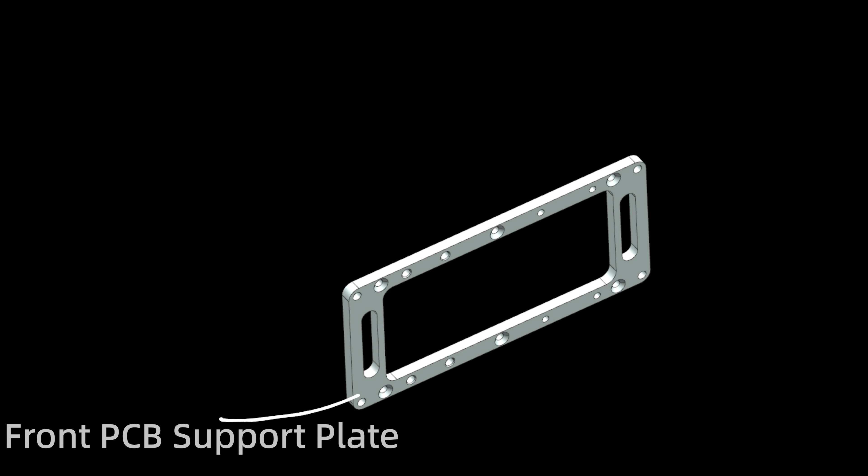The frame structure, as shown in the figure, consists of 6 integral parts: front PCB support plate, back PCB support plate, upper PCB holder, bottom PCB holder, TI detector holder, and EO holder. Now, let's focus on the PCB support plate and the PCB holder.

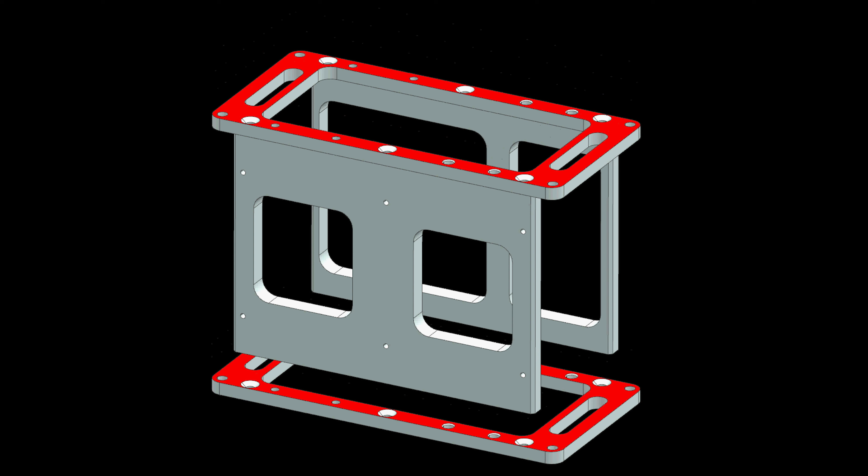As shown in the figure, the red area serves as a mounting area, and the surfaces of these parts must be accurately aligned before they are fastened with screws. As a result, we have set a positional tolerance requirement of 0.01 for parallelism at the corresponding position shown in the drawing for these 4 components. These strict requirements ensure a tight and accurate fit, which guarantees optimal performance and reliability of the thermal imaging devices.

Deformation is a common challenge when machining thin, flat parts. Reduce the feed rate during each machining operation and increase the number of machining passes. This allows the stress of the material to be released gradually and evenly. In the context of these 4 parts, this method allows precision requirements to be met while effectively managing machining costs for the customer.

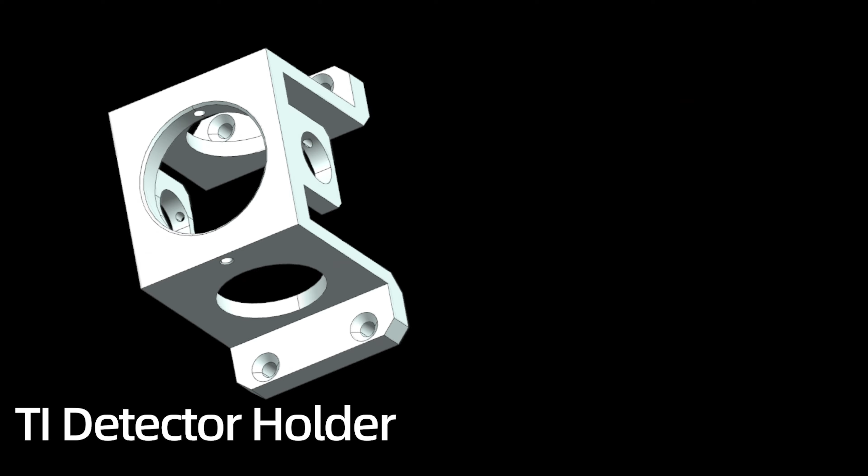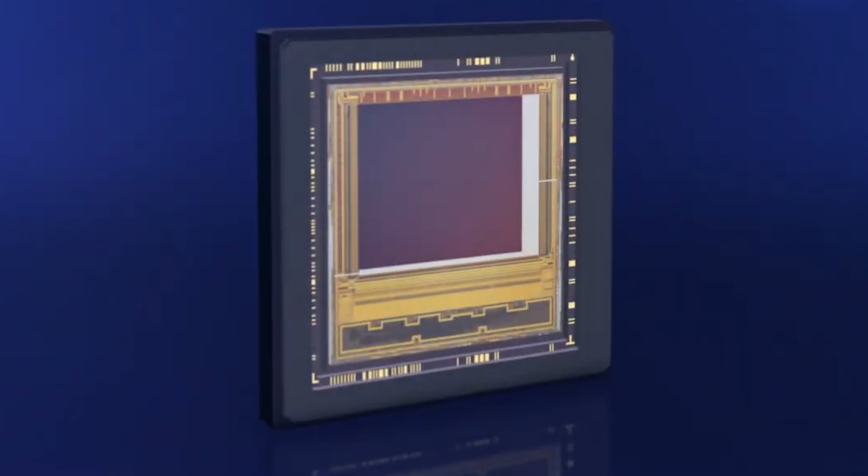The TI detector holder and the EO holder play a critical role in supporting sensor components designed to detect and collect signals from the external environment. The precision of these sensor components is critical, as any installation angle or position offset can directly affect the accuracy of the input data. The EO holder acts as a housing for the low-lux CMOS, a critical component in the imaging system.

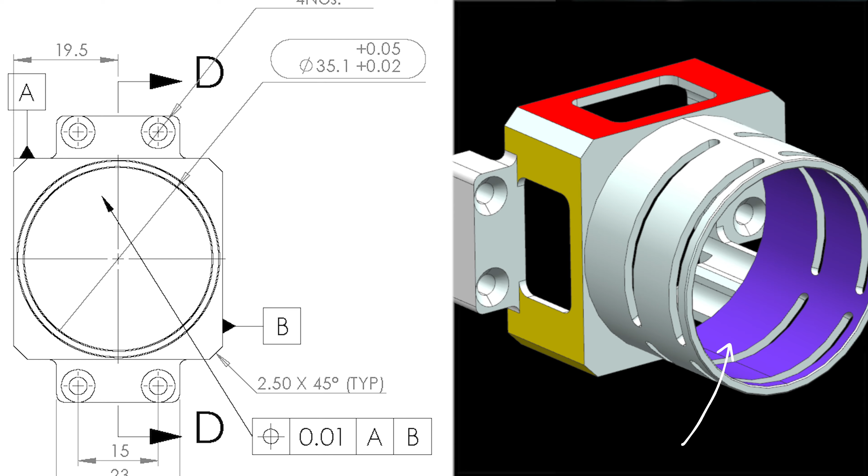The drawing shows that the positional accuracy of the purple EO sensor mounting position is defined with respect to the yellow surface A and the red surface B, with a precision requirement of 0.01 mm. In addition, the diameter accuracy of the purple area is specified as +0.02 to +0.05, which enables smooth mounting and effectively limits the sensor vibration in the mounted position.

A 3-step approach is proposed to optimize the manufacturing process. First, the rough appearance of the part is quickly machined, saving time for precision machining in later steps. The second clamping process is a combined turning and milling approach that machines the yellow, red, and purple surfaces in one pass to meet the position and accuracy requirements outlined in the drawing.

The final step is to machine the remaining structural features. Special features are designed to prevent deformation of the parts during this process, ensuring the overall integrity and precision of the EO holder. The TI detector holder serves as a housing for the thermal imager.

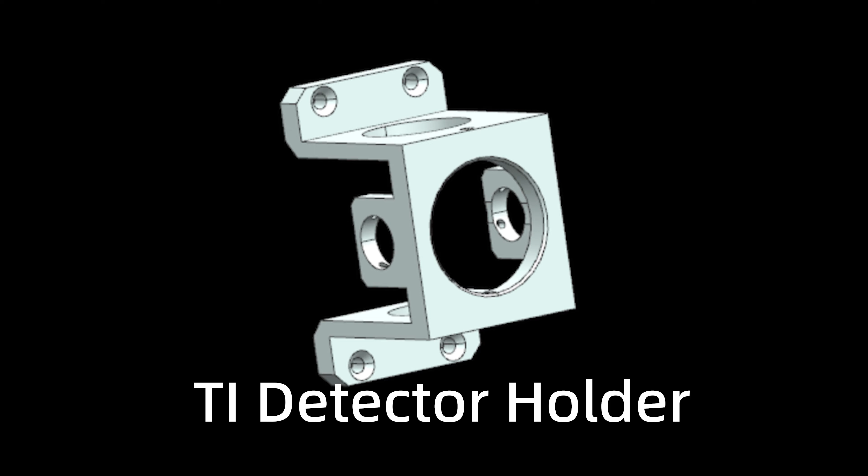Examination of the drawing reveals the presence of 4 holes designed to secure key components. Of particular importance in this case is the precise distance between the centers of these circles, which requires a tolerance of ±0.01 mm. To meet such a high precision requirement, it is essential to use suitable clamping devices to ensure that the workpiece is held flat and upright during machining.

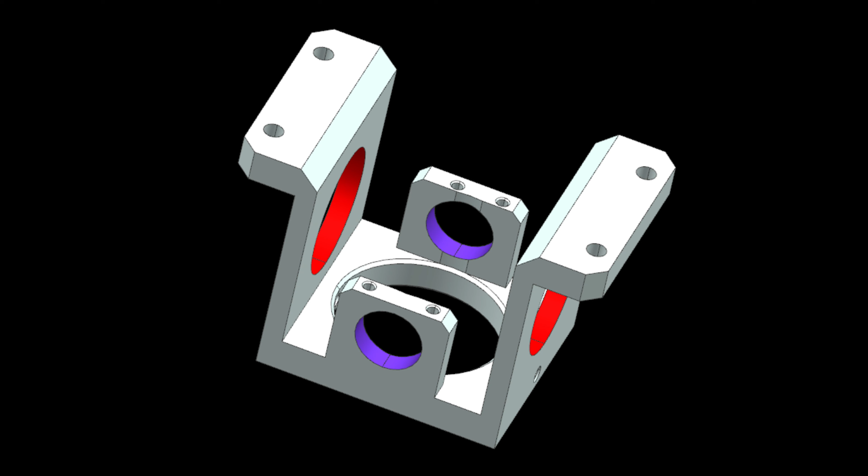In addition, attention must be paid to the 2 red holes and 2 purple holes, which are concentric circles. To ensure concentricity, it is important to machine these concentric circles in one single pass.

Surface finishing is a critical step that should not be overlooked once the part has been machined. The oxide layer produced by military-grade Type 3 hard anodizing is significantly thicker, up to 50 µm. This results in excellent scratch and chemical resistance, making it an ideal choice for parts exposed to harsh conditions.